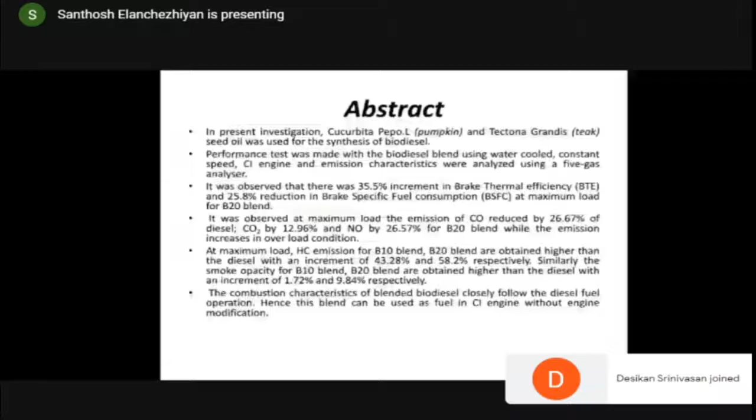It was observed that at maximum load, the emission of CO reduced by 26.67% compared to diesel, CO2 by 12.96%, and NO by 26.57% for B20 blend, while other emissions increased in overall conditions.

At maximum load, HC emissions for B10 and B20 blends were obtained higher than diesel, with an increment of 43.28% and 58.2% respectively.

Similarly, the smoke opacity for B10 and B20 blends were obtained higher than diesel, with an increment of 1.72% and 9.84% respectively. The combustion characteristics show the blend can be used as fuel in a CI engine.

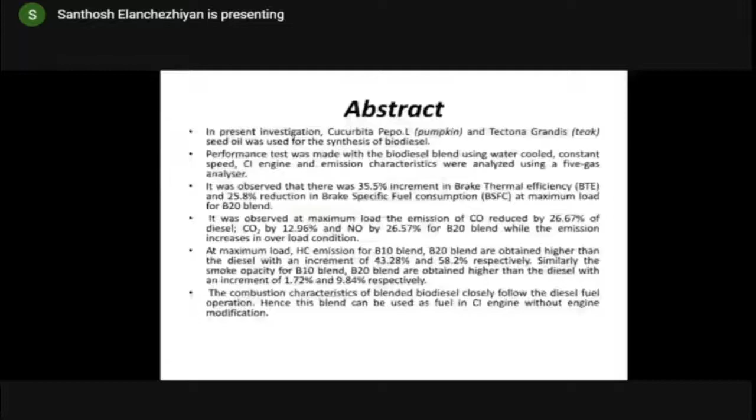Introduction. Biodiesel is produced through a transesterification production method. The two-step transesterification methodology was carried out on clean oil.

From the literature review, it is found that mixed biodiesel has not been concentrated on by researchers. In this regard, the proposed research work focuses on the ignition characteristics of pumpkin-teak seed blend.

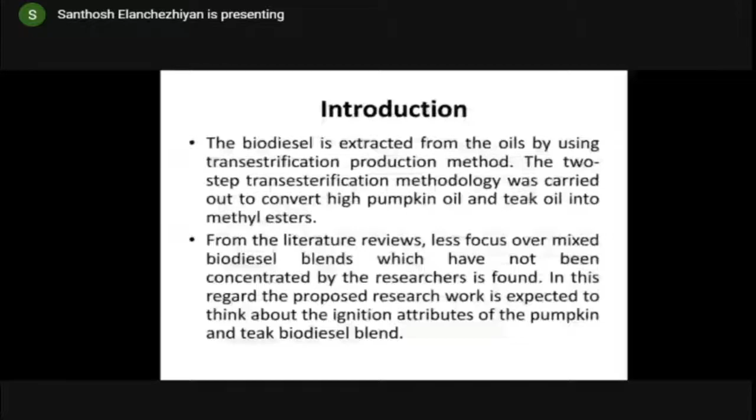Extraction of biodiesel. The purchased pumpkin seed oil and teak seed oil were used for production of biodiesel by the esterification process, carried out using the exact amount of methanol (200 ml) and KOH (15 gram).

The biodiesel was washed with water and heated for removing traces of water. After converting biodiesel from the oils, a pumpkin and teak biodiesel blend was formed, denoted as PT biodiesel.

100 ml PT biodiesel plus 900 ml diesel is called B10 blend. 200 ml PT biodiesel plus 800 ml diesel is called B20 blend. 300 ml PT biodiesel plus 700 ml diesel is called B30 blend.

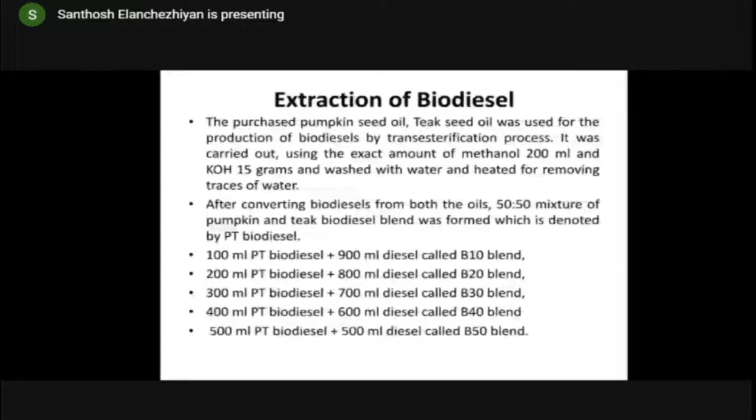400 ml PT biodiesel plus 600 ml diesel is called B40 blend. 500 ml PT biodiesel plus 500 ml diesel is called B50 blend.

Physical properties of fuel and its blends. For diesel fuel: density 825, kinematic viscosity 2.87, calorific value 42,000, flash point 65 degrees Celsius, fire point 78 degrees Celsius, cetane number 49.

PT biodiesel: density 823, kinematic viscosity 4.45, calorific value 38,579, flash point 150 degrees, fire point 160, cetane number 52.65.

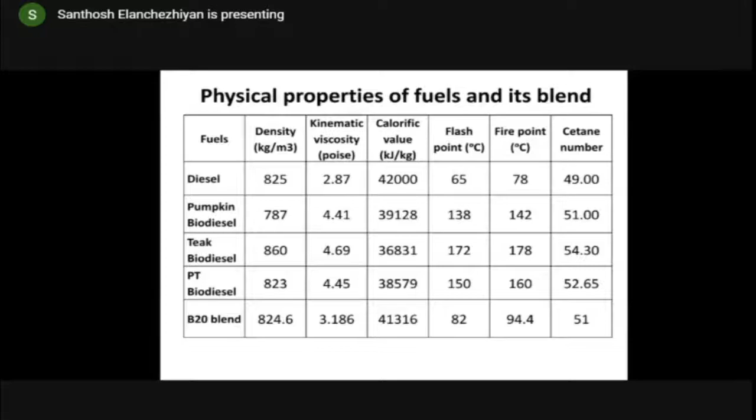B20 blend: density 824.6, kinematic viscosity 3.186, calorific value 41,316, flash point 82 degrees, fire point 94.4 degrees, cetane number 51.

Next, the experimental setup. The performance and emission qualities of mixed biodiesel were tested utilizing a single cylinder, 4-stroke, water-cooled, constant speed CI engine running at 1,500 rpm.

The compression ratio of the Kirloskar TV-1 test engine is 17.5:1, with the maximum power of 5.2 kW.

The engine gets the load from a load cell fitted with an eddy current dynamometer.

The engine execution was observed by utilizing a data acquisition system. A solenoid controller was utilized to gauge specific fuel consumption.

The flywheel closer to the engine is connected to a non-contact type sensor which measures the speed of the engine, to observe the combustion quantities and prediction rates.

The engine load was applied as a percentage.

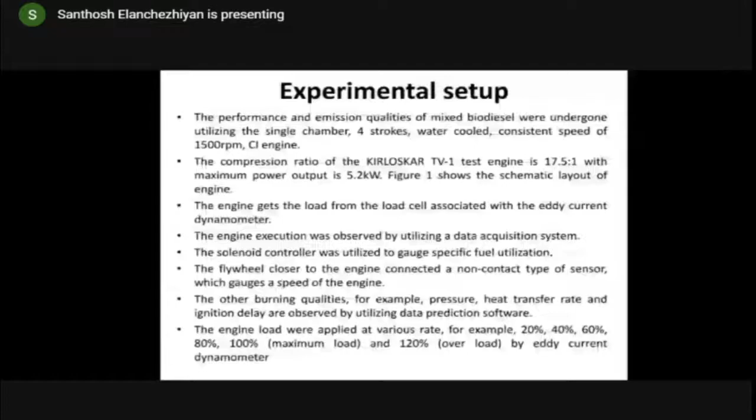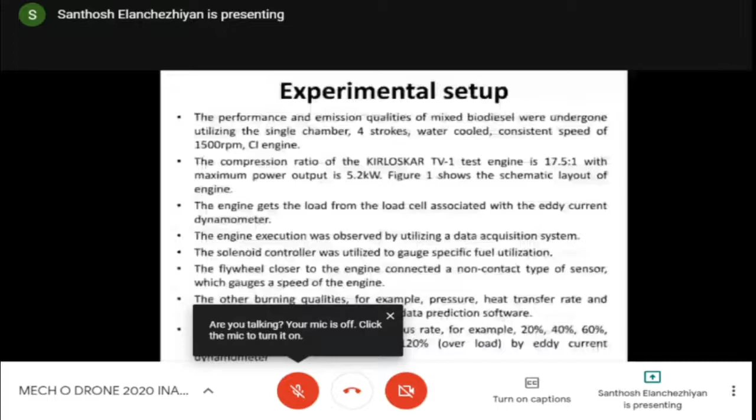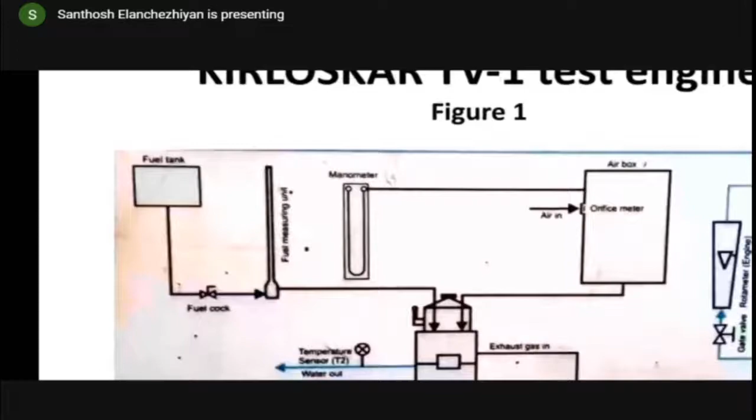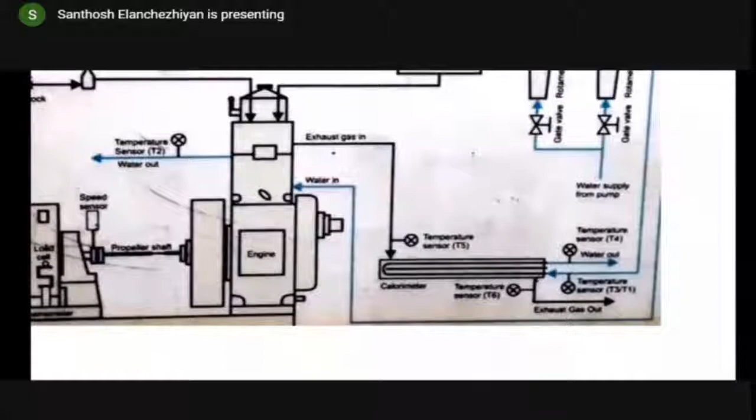This is connected on the engine's left hand side with the shaft, then speed sensor, load cell, and dynamometer. On the right side is the exhaust gas discharge.

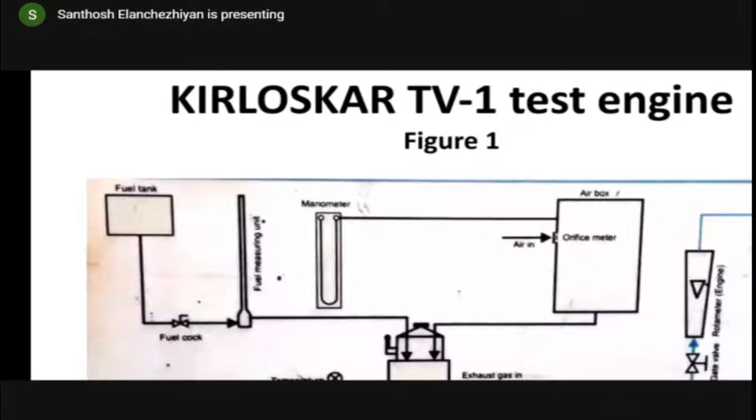Yes, there is a manometer, and the other end of the engine is connected with a rotameter.

Results discussion: the engine analysis performance and emission characteristics of PT biodiesel blend were compared with diesel fuel. The exhaust emissions of blended biodiesel such as CO, CO2, HC and NO were noticed from experimental observations using a gas analyzer.

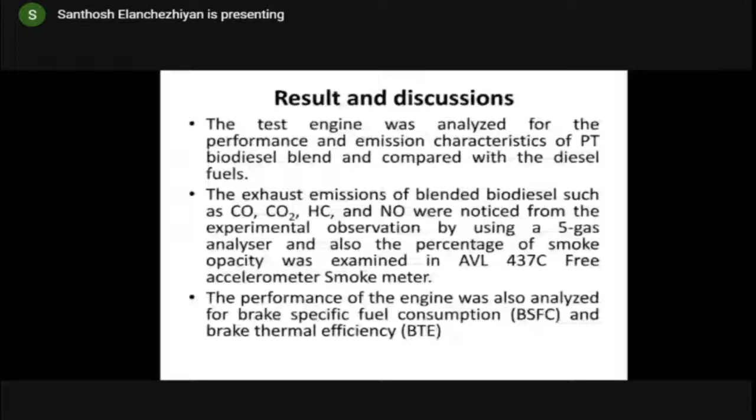Also the percentage of smoke opacity was measured as per AVL 437C. The performance of the engine was also analyzed for brake specific fuel consumption and brake thermal efficiency.

Performance characteristics, BTE: Figure 2 shows the brake thermal efficiency for the biodiesel blend. At the maximum load of 100%, the BTE was observed to be 29.07% for diesel and 39.39% for the B20 blend, an improvement of about 35.5% over diesel noticed with the PT biodiesel.

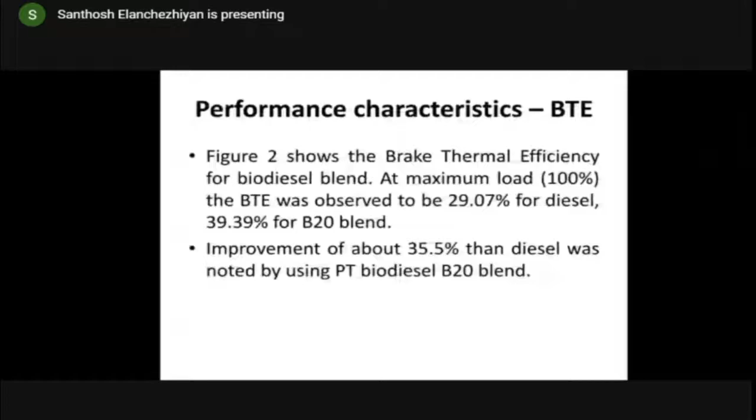This is a graph about the blend. This is the BTE graph, visible here.

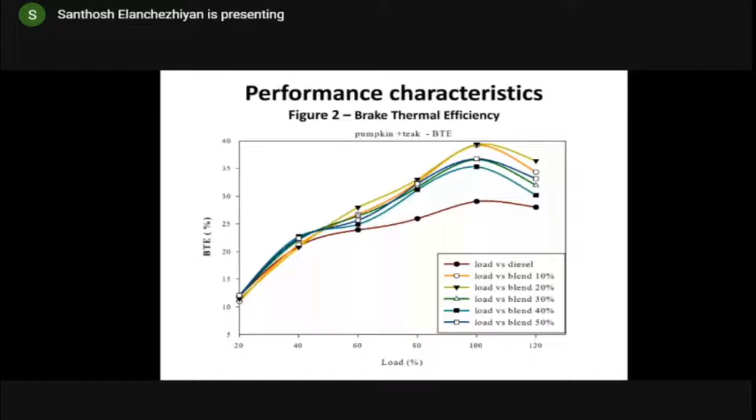Performance characteristics of BSFC: Figure 3 shows fuel consumption with different loads of biodiesel. The BSFC was observed at a decreasing rate.

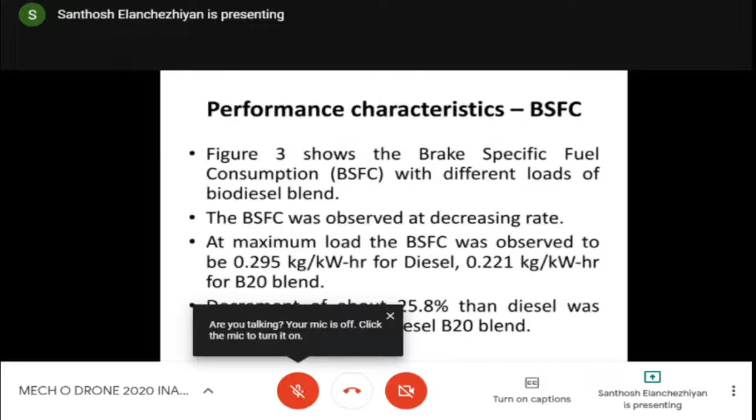At the maximum load, the BSFC was observed to be 0.295 kg per kilowatt hour for diesel and 0.221 kg per kilowatt hour for the blend, a reduction of about 25.8% compared to diesel.

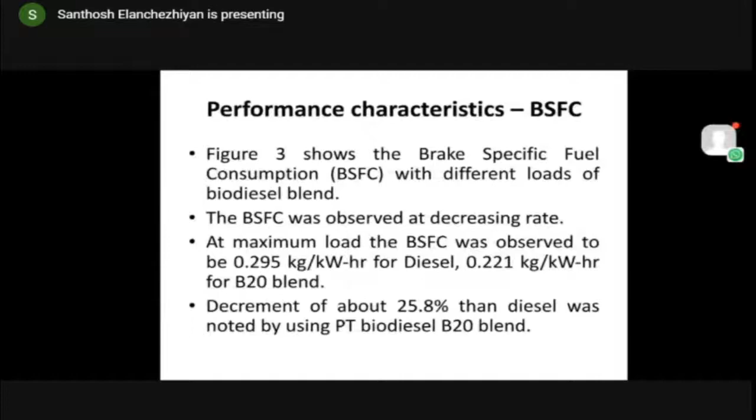Characteristics, Figure 3, BSFC.

Tests were done on a single cylinder, four-stroke, direct injection, water cooled diesel engine with an eddy current dynamometer. Performance and emission characteristics of PT biodiesel were observed as follows.

The diesel PT biodiesel blend demonstrated a decrease in BSFC by 25.8% at maximum load compared with diesel and other blends. Also, PT biodiesel promotes a 35.5% increase in brake thermal efficiency at maximum load compared with diesel and other blends. The B20 blend exhibits a reduction in CO2 emissions at maximum load by 12.96%, comparatively lower than diesel and other biodiesels. Thank you, sir.

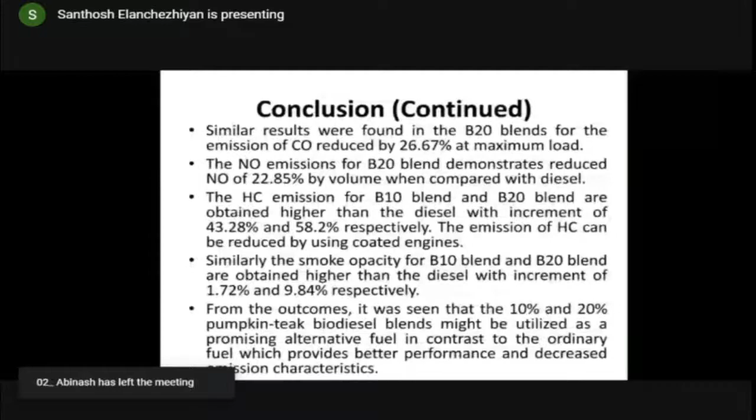The brake thermal efficiency increases by 35%? Yes, sir. It is not possible. Why, sir? The brake thermal efficiency is 35% only, it doesn't increase by 35%.

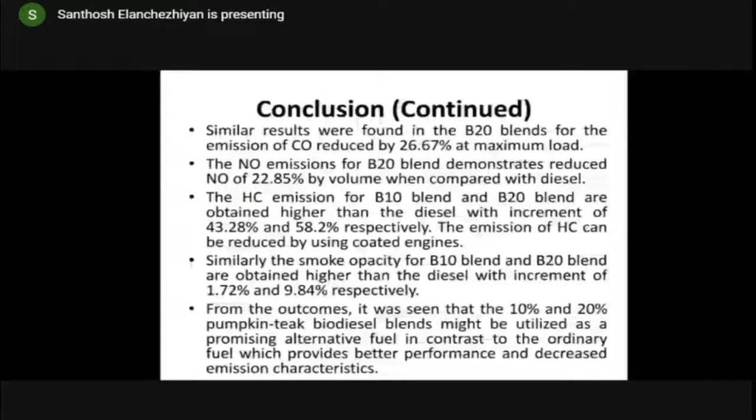Okay sir, change your slide. I think it is wrong. One minute. How is it visible there? Yes, yes.

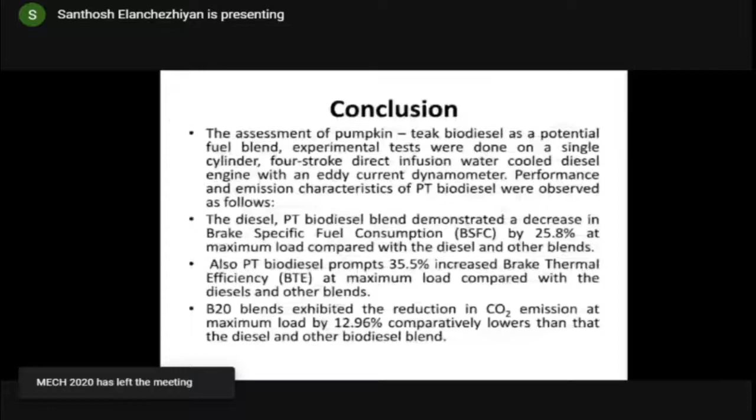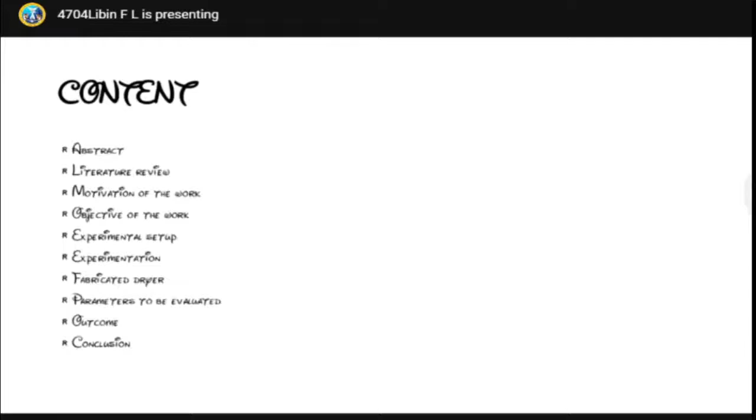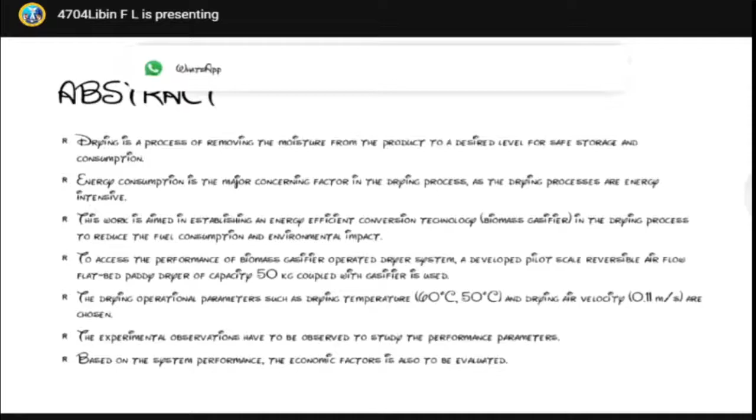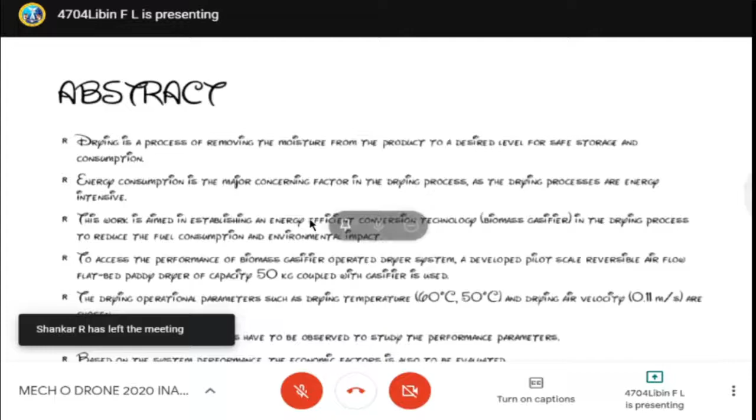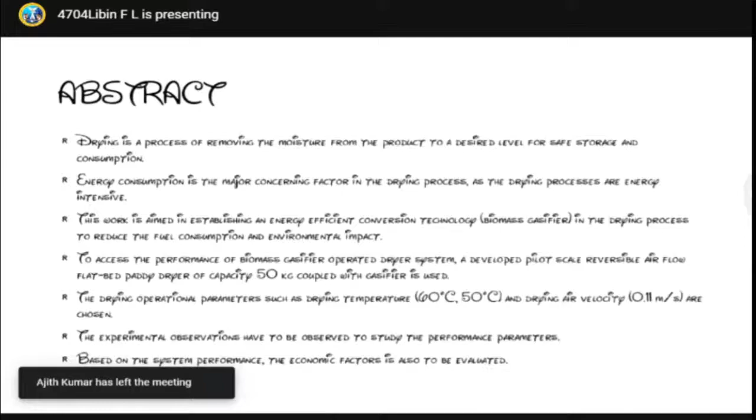Here we are drying paddy as the product, from which the moisture will be reduced using our system.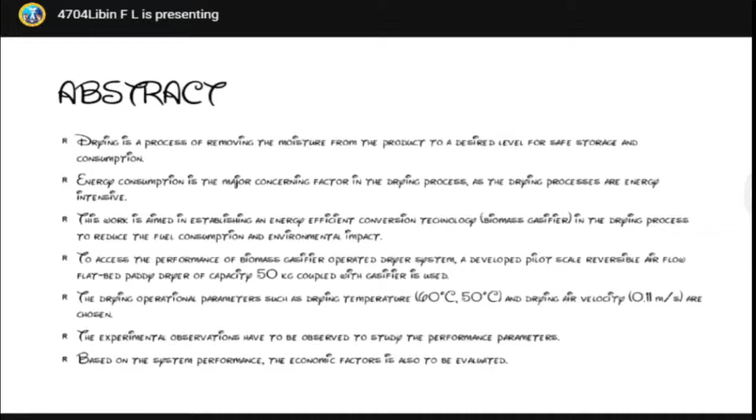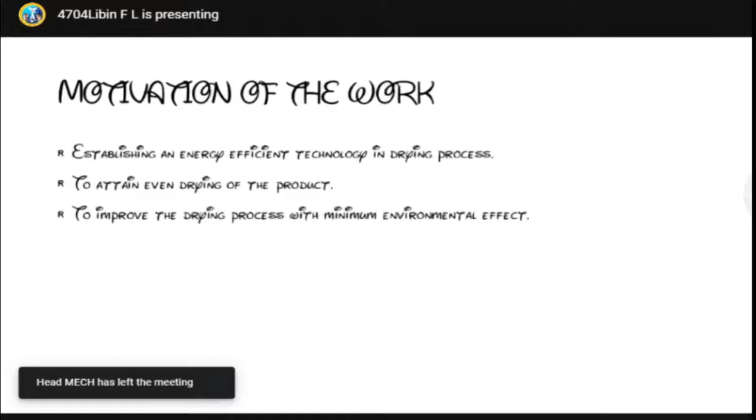The main motivation of our work is establishing an energy efficient technology in the drying process and to attain even drying, because if we dry any product, it is not possible to achieve even drying otherwise.

When we dry in front of the sun, we may get even drying, but it will not be possible because when rainfall occurs, it is not possible.

So we are using our ideas for even drying of the product and to improve the drying process with minimum environmental effect, because we are drying using a technological way which affects the environment.

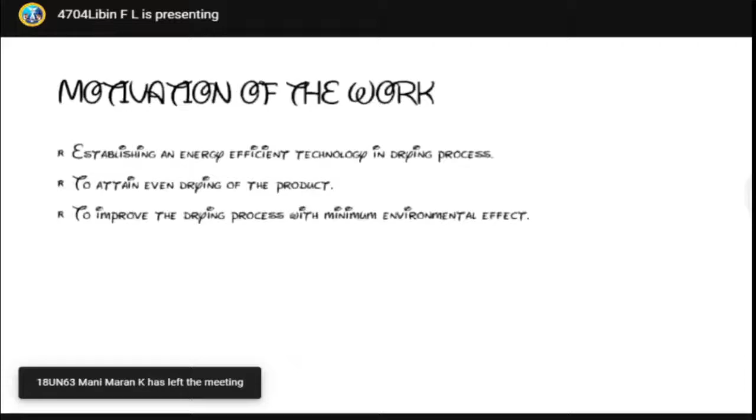We want to utilize heat energy. So when we produce heat, there is some environmental effect. From this, the environmental effect will be minimized through our project.

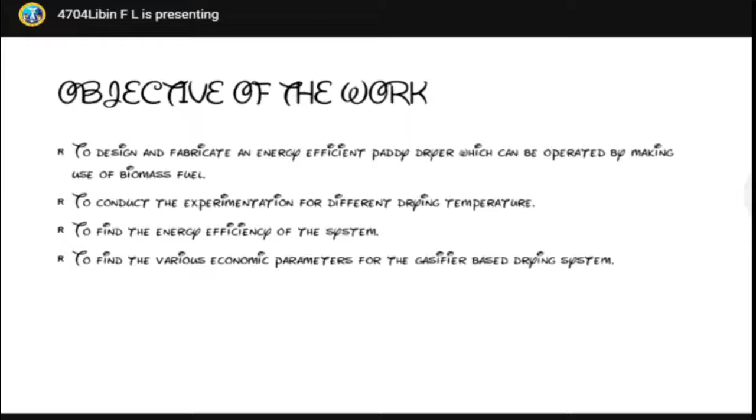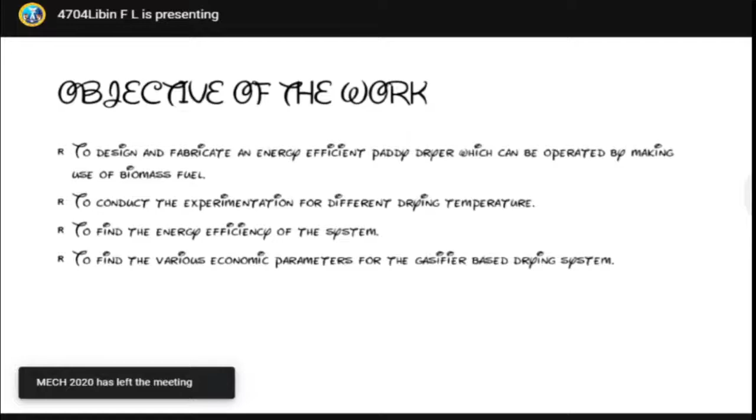Objectives of the work: to design and fabricate an energy efficient paddy dryer which can make use of biomass fuel, to conduct experimentation and find the energy efficiency of the system, and to find various economic parameters for the gasifier based drying system. This is our experimental setup.

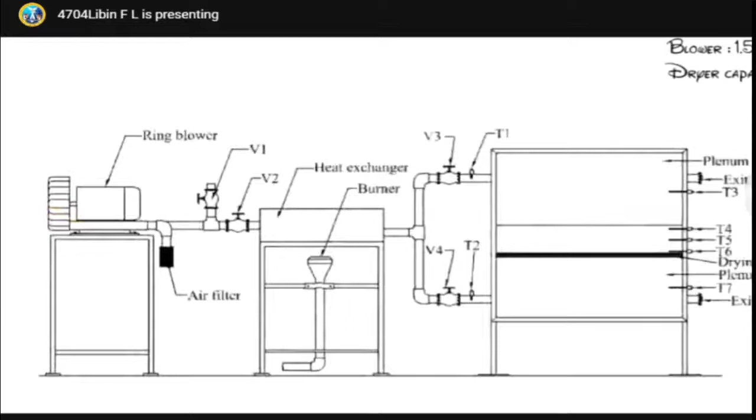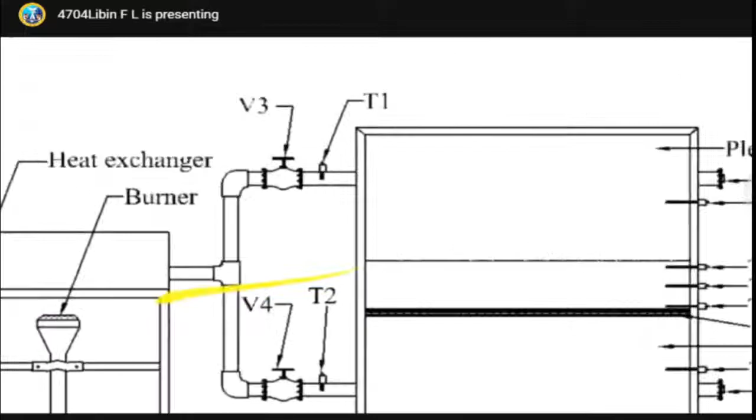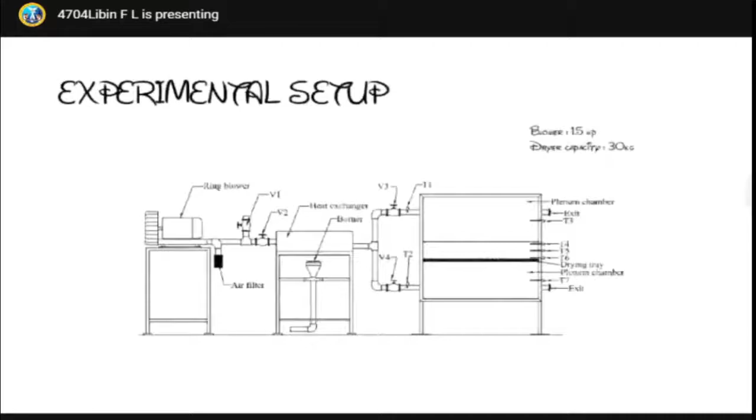This is our experimental setup, and this is a fabricated dryer which is insulated by nitrile foam sheet, which reduces thermal conduction from inside.

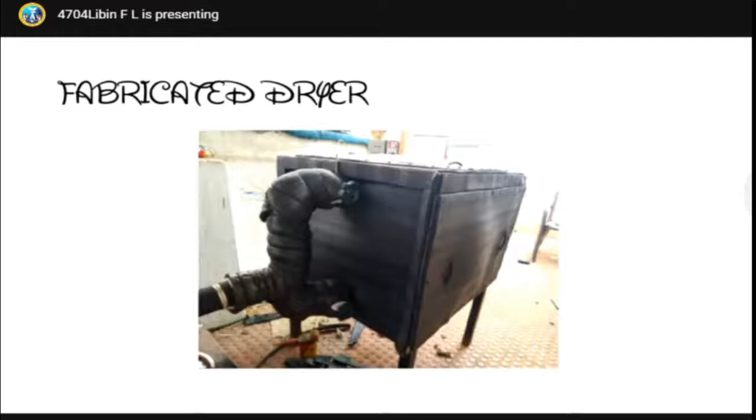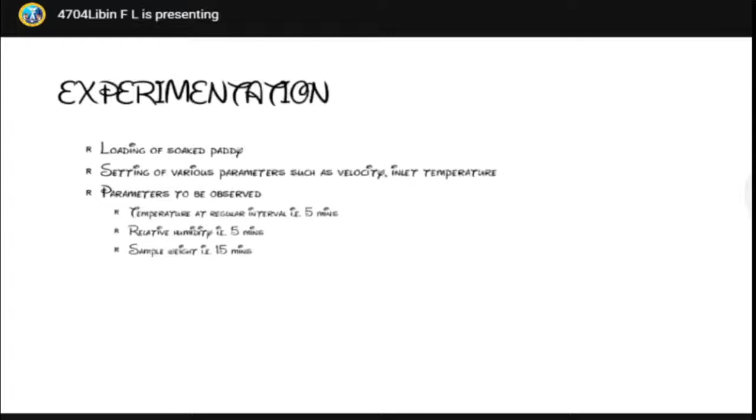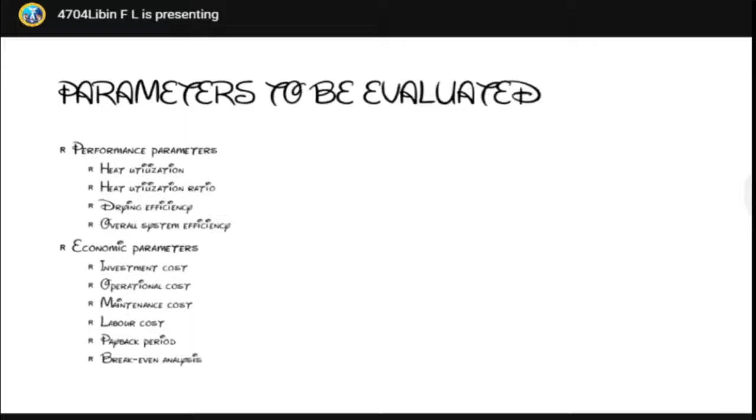Parameters to be evaluated include performance parameters and economic parameters. Performance-wise, heat utilization ratio is measured, and economic parameters like investment cost, operational cost, maintenance cost, labor cost, payback period, and break-even analysis can also be conducted and measured.

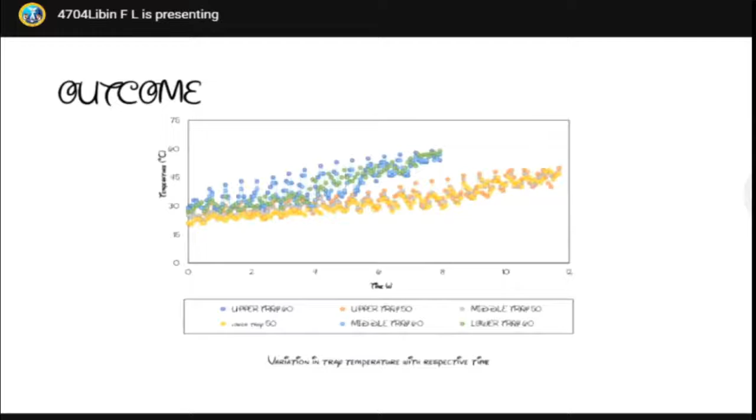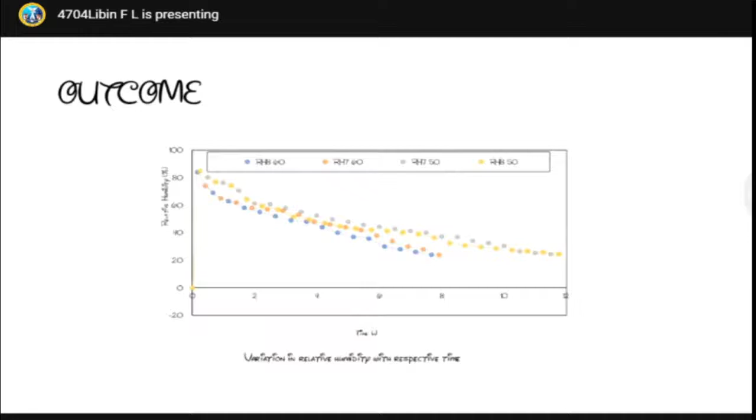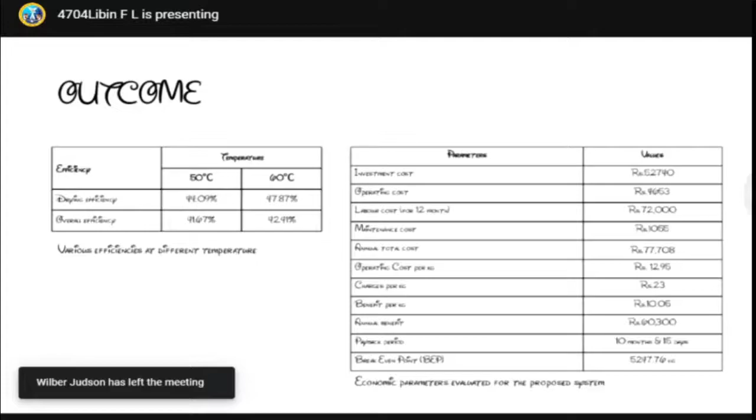Our outcomes include efficiency and temperature - drying efficiency and overall efficiency are determined, with temperature held constant at 50 degrees and 60 degrees Celsius.

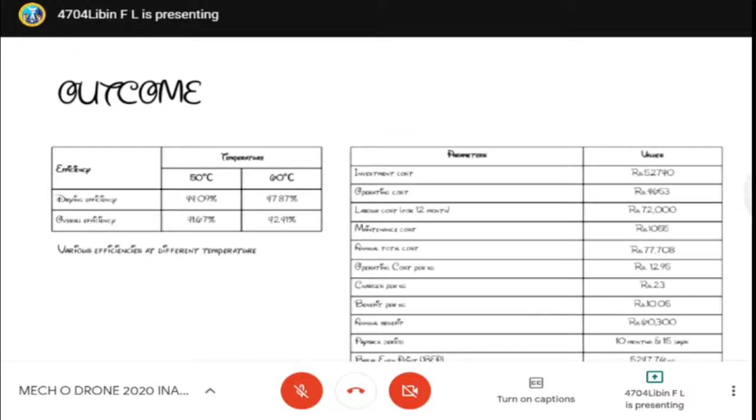At 50 degrees Celsius, drying efficiency is 44.09% and overall efficiency is 41.67%. At constant temperature of 60 degrees Celsius, drying efficiency is 47.87% and overall efficiency is 42.41%. Efficiency varies at different temperatures. Another economic parameter was evaluated for the proposed system.

This is the investment cost - we invested 52,740 rupees. Operation cost is 4,653 rupees, and labor cost is 72,000 for 12 months, which is only for analysis purposes since we are doing a prototype only.

This is planned for a huge amount, with maintenance for the year at 1,055 rupees, and annual total cost is 77,708 rupees.

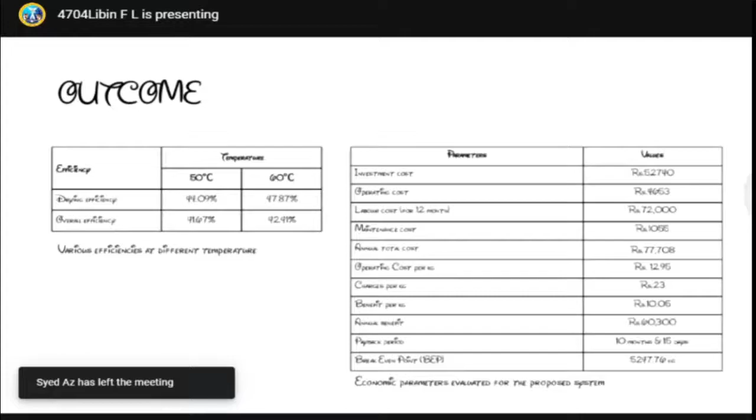Operation cost per kg is 12.95. Charges per kg is 23, benefit per kg is 10, and annual benefit is 60,300 rupees. Payback period - when we invest in producing a drying machine, we get profit from 10 months and 15 days.

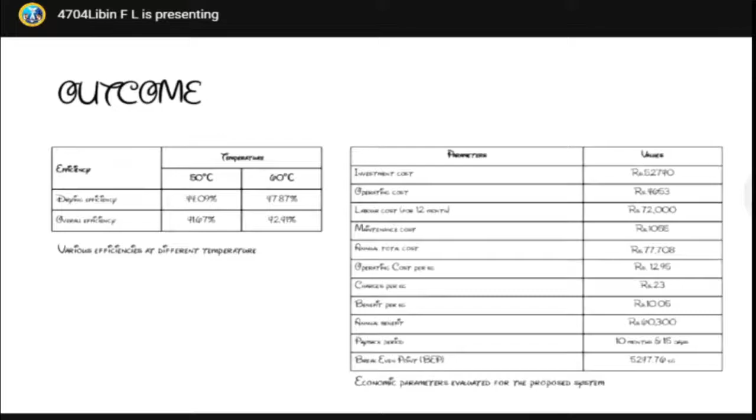Break-even point is 5,247.76 kg - that is our break-even point, and anything above 5,247 is definitely profit for our project.

In conclusion, the energy analysis was carried out to determine the heat utilization, heat utilization ratio, overall efficiency, and drying efficiency of the product process.

At a constant 50 degrees Celsius, the drying efficiency and overall efficiency were found to be 44 percent and 41.67 percent respectively. At 60 degrees Celsius, they were 47.87 percent and 42.41 percent respectively.

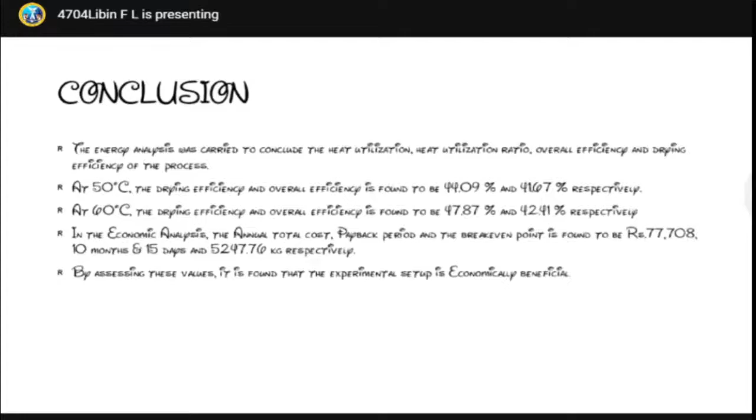The economic analysis, including annual cost and payback period, was analyzed, and by assessing these values, it is found that the experiment is economically beneficial.

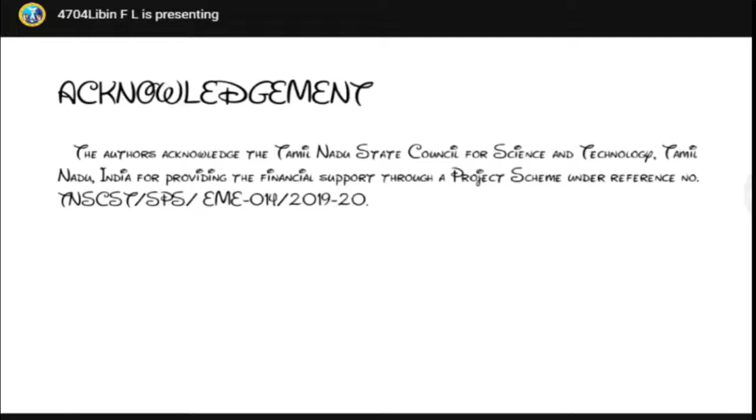Our project was selected by the Tamil Nadu State Council for Science and Technology under project scheme reference number TN-SCST SPS EME 014, 2019-2020.

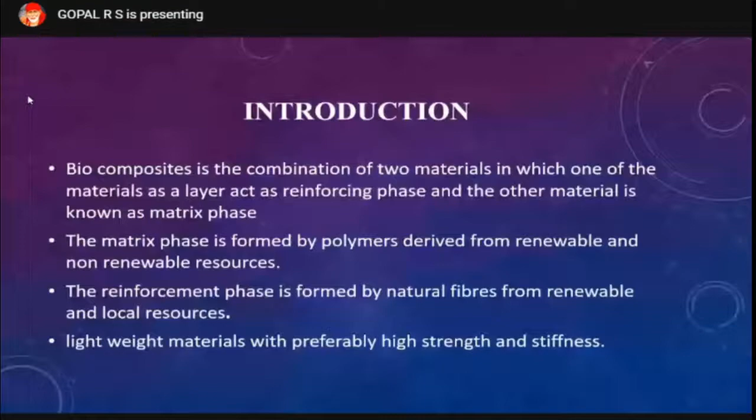Stone is limestone. It is the skeleton of an animal without a backbone and is typically composed of calcium carbonate. It is a harder protective layer created by an animal that lives in the sea. Limestones are collected from seashells, cleaned and dried for 3 days after grinding. The seashells are crushed and made into fine particles.

Next one is wood powder. It is a finely pulverized wood that has a consistency fairly equal to sand or sawdust, but can vary considerably, with particles ranging in dimension from a fine powder to roughly that of a grain of rice. All high quality wood flour is made from hardwoods because of its strength. These powders were collected from sawmills and changed into fine particles.

Next one is polyester resin. It is an unsaturated resin formed by the reaction of dibasic organic acids and polyhydric alcohols. It is a colorless and oily liquid. Polyester is the matrix base for this composite.

Hardener. The hardener used with polyester resin is also called a catalyst. The catalyst agent creates a chemical reaction that allows the resin to change from a liquid to a solid state.

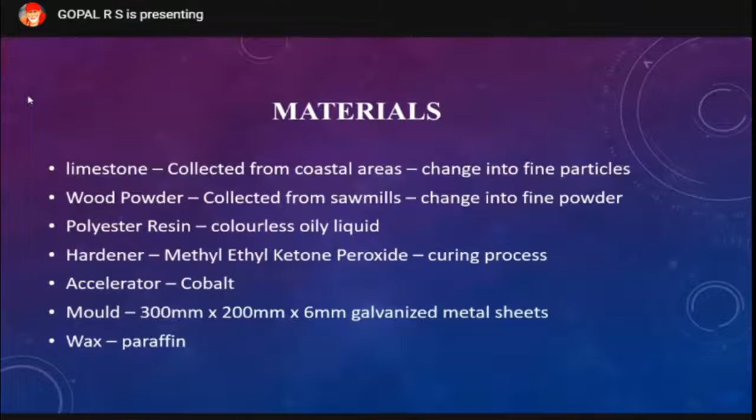White or colorless soft solid that is used as a lubricant and for other applications.

Next one is the hand layup process. Hand layup is the simplest and oldest open molding method of the composite fabrication process. The infrastructural requirements for this method are also minimal. It is a low volume, labor intensive method.

The processing steps are quite simple. First, the release gel is sprayed on the mold surface to avoid the sticking of polymers to the surface. Thin plastic sheets are used at the top and bottom of the mold plate to get a good surface finish of the product. The reinforcement base is mixed with thermosetting polymer in liquid form thoroughly in a suitable proportion with the hardener.

That mixed layer is poured on the surface of the mold. The mixed layer is uniformly spread with the help of a brush. The process is repeated for each specimen.

After placing the plastic sheet, release gel is sprayed on the inner surface of the top mold plate, which is then kept either at room temperature or at some specific temperature.

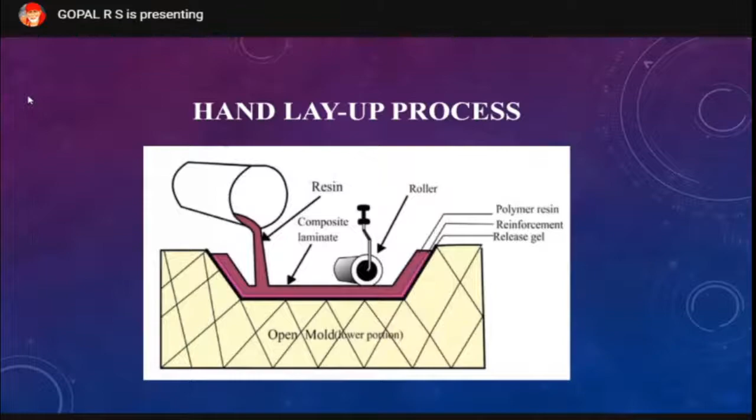Both the powders were dried in sunlight, and the volume of the die and 5 different composition levels of the specimen were calculated. Then the raw materials were weighed using a weighing machine with required dimensions.

The metal mold was placed on a clean and flat surface. Paraffin wax was applied on the inner surface of the mold. Hardener and accelerator were mixed with the polymer using a 1:10 ratio. Weighed seashells and wood powders were mixed with the resin matrix and applied into the mold.

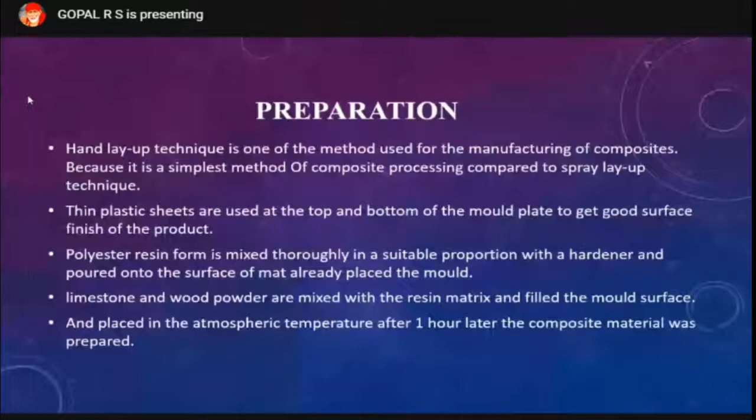Tensile test. It's one of the most fundamental tests. It applies tensile force to a material and measures the specimen's response to the stress. Tensile strength is often referred to as ultimate tensile strength and is calculated by dividing the peak tension force the sample withstands by its cross-sectional area.

The tensile test of the composite was done using a universal testing machine. The samples were cut from the molded sheet into a rectangular shape with dimensions 210 mm long, 20 mm width, and 6 mm thick.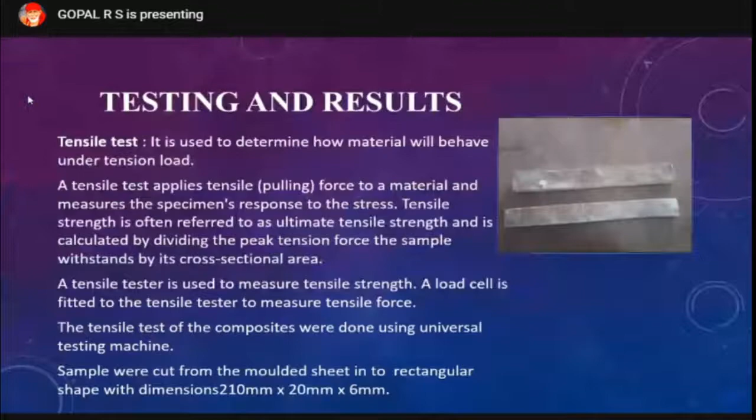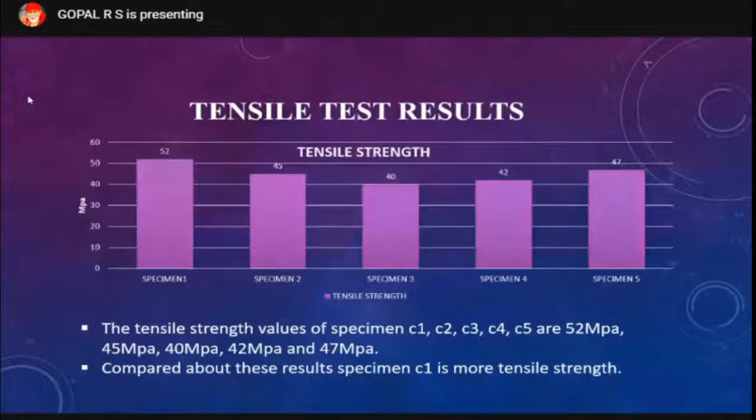Tensile test values of specimens are shown in the bar chart. When comparing the results, specimen C1 shows more strength. Next one is the flexural test.

Flexural testing is used to measure the flexural strength and flexural modulus. The material is laid horizontally over two points of contact on a lower support span, and then a force is applied at the top through either one or two points of contact on the upper loading span, until the specimen fails. The maximum recorded force is the flexural strength of that particular sample.

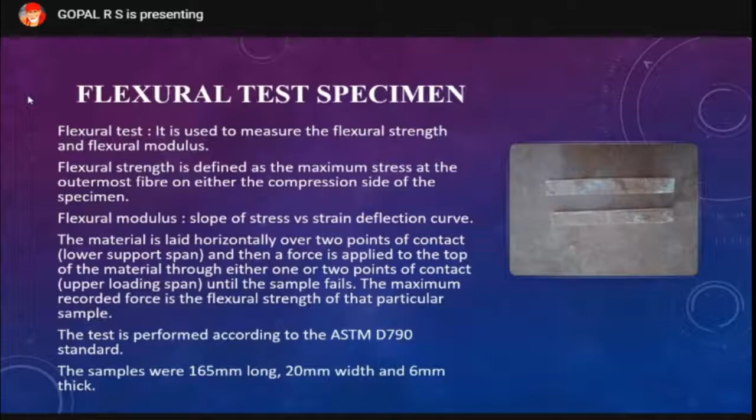Next is the impact test specimen. The impact test determines the amount of energy absorbed by a material during fracture. The absorbed energy is a measure of the given material's toughness.

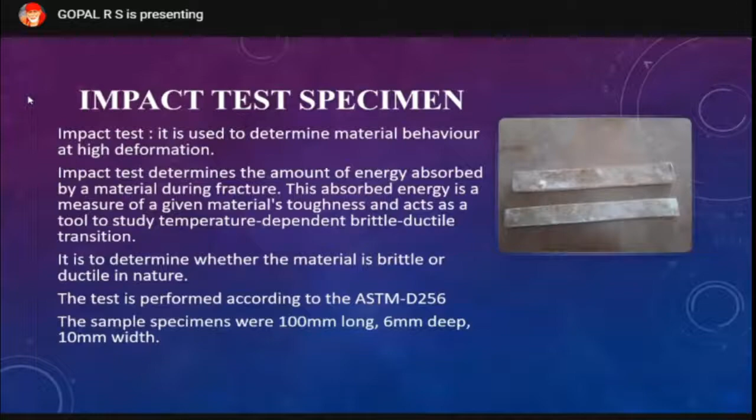The Charpy impact test was used to measure the impact. The impact test values are shown in the bar chart. Comparing these results, specimen C1 is the best.

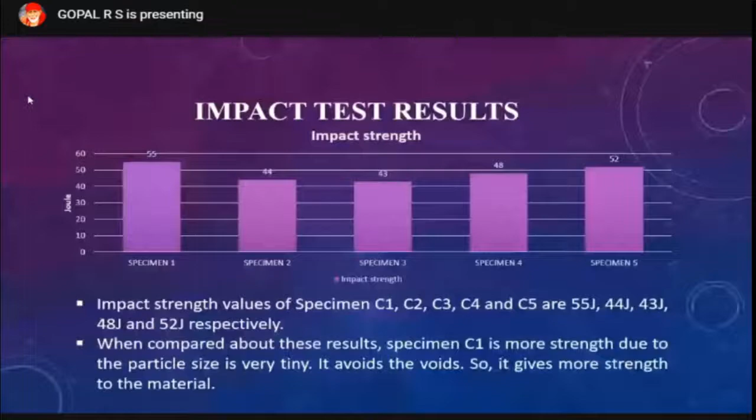Next is the hardness test specimen. It is used to determine the hardness of a material, its resistance to deformation. There are two types, based on different load applications.

These differ based on two different load applications. The hardness number is based on the ratio of load and area of indentation, followed by the depth of penetration, tested under minor load and major load conditions. The specimens were cut from the moulded sheet in a square shape with dimensions 30 mm long, 30 mm wide.

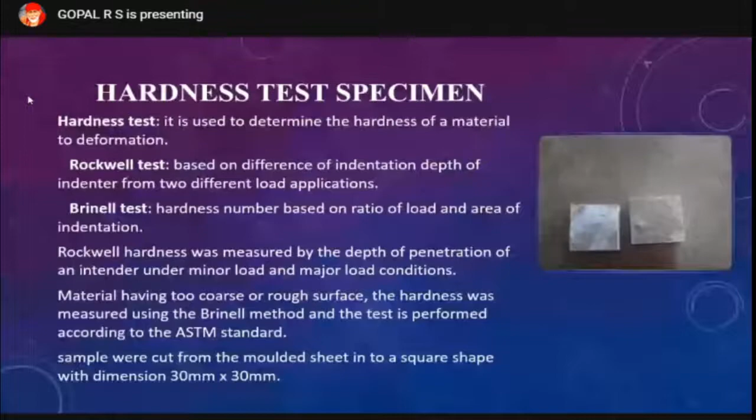The chart indicates the Brinell test results; blue indicates the Rockwell values. Comparing these two tests, the best is...

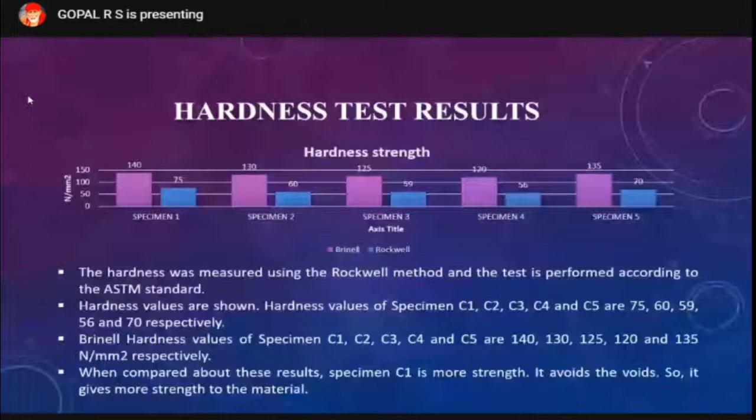Material applications: it is used in construction and interior design, in electronic components like switchboards, and in marine applications, automotive industries, etc. Next is the conclusion.

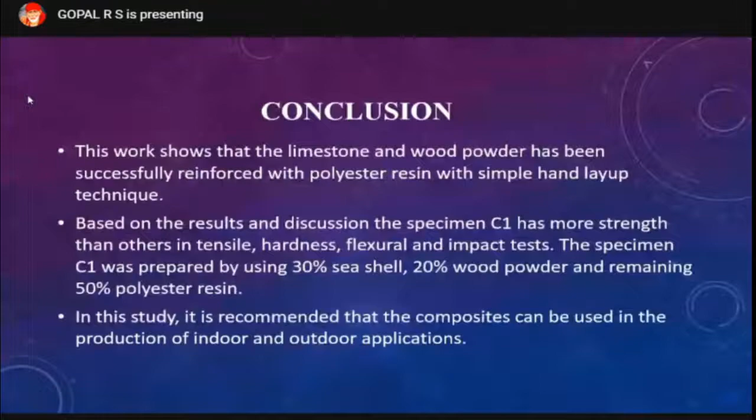In this study, it is recommended that the composites can be used in the production of indoor and outdoor applications. Thank you.

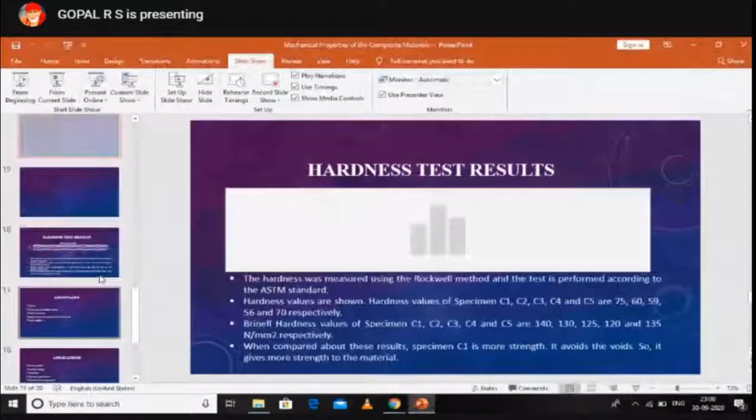What is the comparison you have made between these two, tensile and flexural? Only that, not asking about hardness or any other test. Only asking about tensile or flexural. In these two experiments, what did you observe with the composite you prepared?

Your result and all. You just said one sample is good for all the tests. According to the composite preparations, a material, a composite cannot support all the properties.

The tensile strength is much more than the other materials being compared. It could lose some other property in order to give tensile strength. That's why I ask you only about tensile and only about flexural, what inferences did you get from these two to say your composite material is better than normal?

Yes, sir. My composite material is very hard. For the tensile test process, I used the universal testing machine.

The load applied on the specimen causes it to break. It takes some time to break. The composite takes some time to break, and automatically the strength is increased.

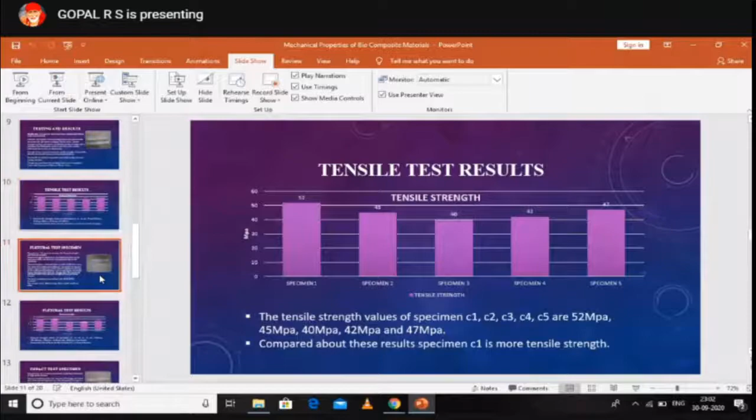But what about flexural? Same process, sir. The composites were very thick and hard. In the flexural test, the load is applied in the middle of the composite. The composite materials take time to break.

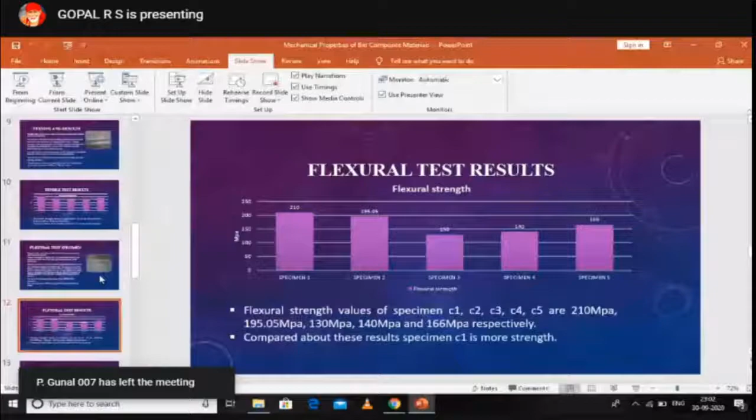So what is the time for this one? How much time does it take to break in flexural? We cannot expect the same time for tensile and for flexural, it will not break in the same time. According to the analysis, it cannot take the same time in tensile and in flexural, it must be different.

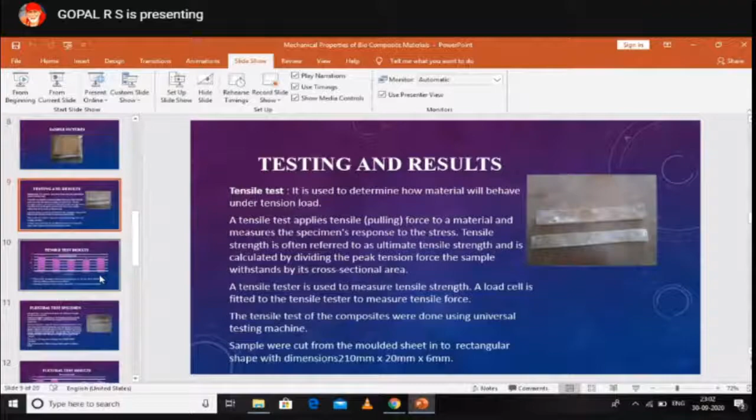I'm asking you what time you calculated among these two experiments, and which one takes much more time to break. Flexural test, sir. The flexural test takes more time to break. Yes sir, okay, fine.